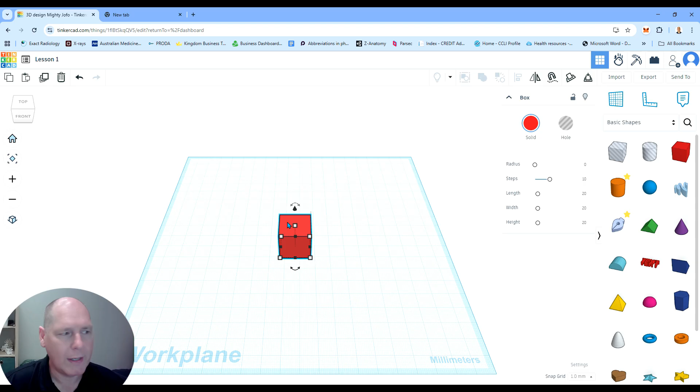I can do it one of two ways—either use the mouse wheel, or simply select this button here and it will take me right up to the image. For me that's a bit close, so we can use the minus button to go back a bit, and get closer again as well.

This one here will just bring us into a different perspective. I'm not a fan of that, so let's go back to more of a 3D perspective. Let's start with copy and paste.

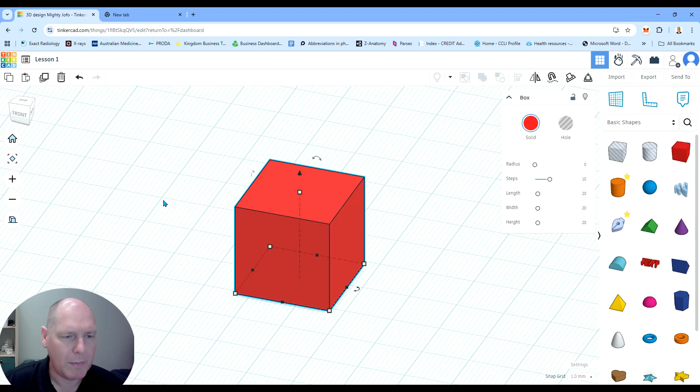Simply copy—we've copied it—paste, and we paste the new one right there. What's nice about copy and paste is we can actually copy and paste from other sessions. So let's say you've got another one open, you can copy and paste that object over straight into this one.

Next one is duplicate. Duplicate is going to create another copy of the object in exactly the same place. So we hit duplicate—this is where duplicate becomes powerful. Now we have object 1 and object 2.

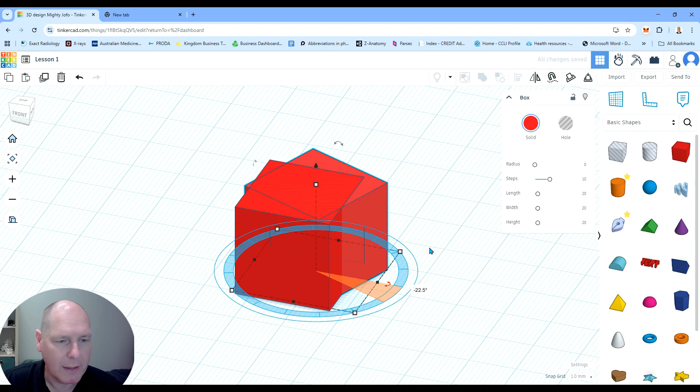I'm going to take the duplicated one that's selected, move it out just a little bit like this, and rotate it 22.5 degrees. Now you'll see that block is different.

Now let's say I want to repeat what I've done. I don't have to do another duplicate and turn it again—I can simply hit the duplicate button again, and it's going to duplicate what I've done. So if I've moved it, it's going to move it the same amount, same direction, and also rotate it the same. Let's duplicate it, and you'll see the next one has been placed like that.

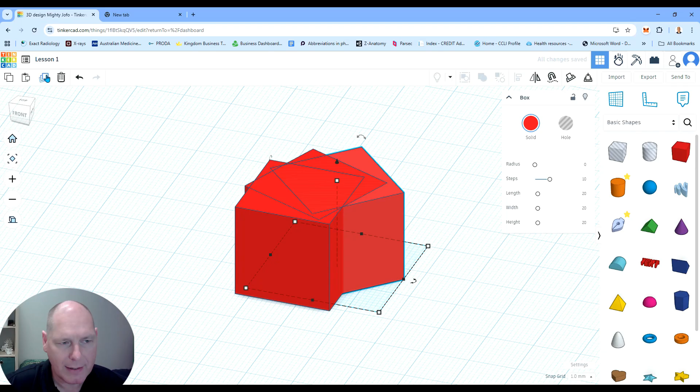If we carry on like that, we're going to get a nice little circular pattern. Okay, great—there's our circular pattern.

Now the next button is self-explanatory, the trash can—don't like it, trash it. Next one's undo—still didn't like it, let's undo the trash. Very straightforward and simple.

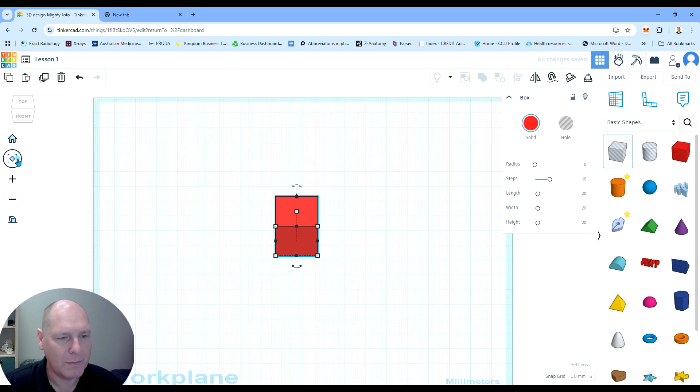Home just takes us back to this block over here, and as I said earlier, this zooms in on the selected pieces. Plus and minus changes our perspective to that again.

Now we're going to move on to the other side, and again there's a lot of things that are not available yet. So if we then bring out a few extra objects, let's put a little cylinder over there.

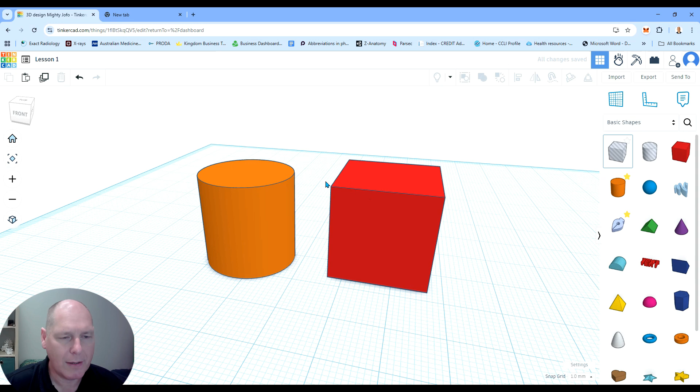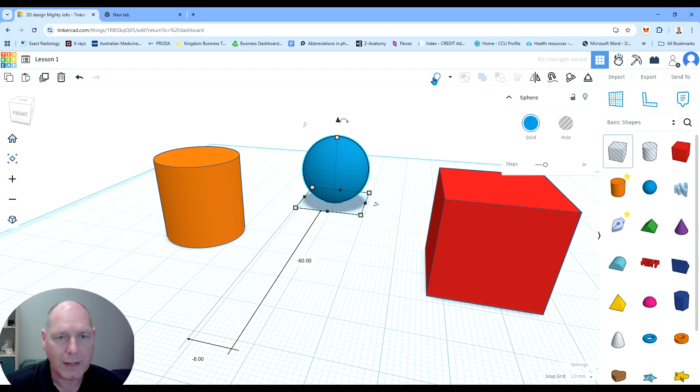Now you'll see that there's some more options in the light bulb. There's for notes and there's for connectors as well. So I'm not going to cover connectors in this video.

Notes, very simple. If you look at the side here, you'll see that's a little notes tool. And we just put it down there and we can say ball. And we've got a note.

As I said earlier, we can now go, great, we've got the little note there, we can then move it around. You can click on it to see it, and it's got a trash can to delete as well. But we can also then hide it. So we click that button there, now the note's gone, and we can show it again by selecting that button. Let's just delete it for now, we don't need the little note.

Great, so moving on from here, we're going to look at the next three tools. And if we've got three objects here, we've got a cylinder, sphere, and a square.

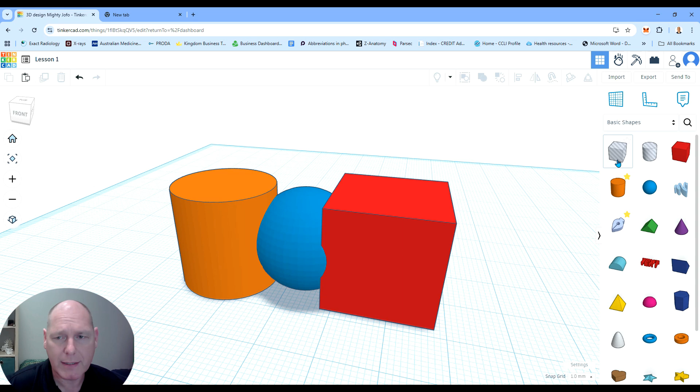If we then want to combine these, the first thing we want to do is group it together. I think let's just add a hole in there as well, just to show you exactly what's happening here. So let's just add a hole like that. So let's say I've got my objects together. I can shift select it like that, and I can then go and bundle group it together. Shortcut Control B. If I bundle group it, I've just grouped it together.

In other words, they're still separate objects, they're just grouped together, and I can go break the group apart, and I can go move each piece.

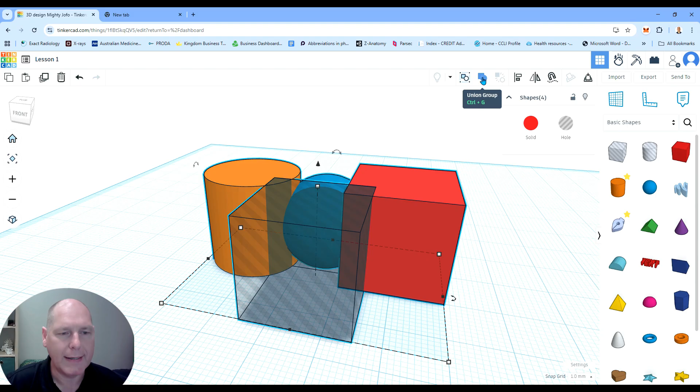Nothing has changed. Now, the next level of grouping is what we call the union group. So what it's going to do here is combine it. It's going to union it. So in other words, the hole is going to cut out pieces of the solids, and the solids are all going to combine into one.

So let's use the union, and you can see here, we'll just confirm it. So what's happened now is we've got a single object, and you can see that piece that's then been cut out from there. Okay, again, we can simply break it apart again and go work on individual pieces from there.

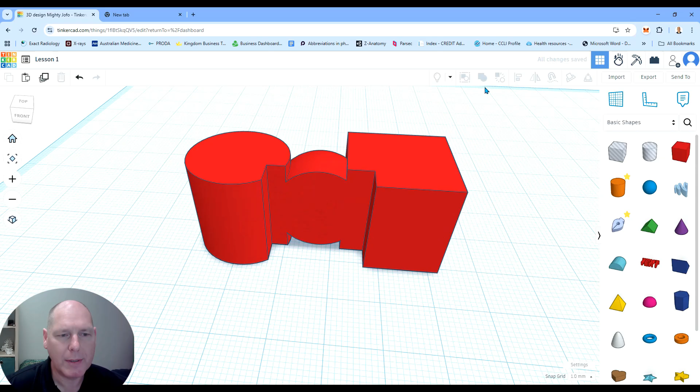Right, so for now let's just group it like that, because this is going to show a little bit better how the mirror tool works. So we've got this bizarre piece now. Let's say, oh, I actually want to mirror it the other way. You can hit the mirror tool, and you can swap it around, and flip it around like that as well. So that's what's handy about the mirror tool in that sense.

So let's just go back, let's break this apart again. And the next tool I want to go through is the align tool, which is right through here.

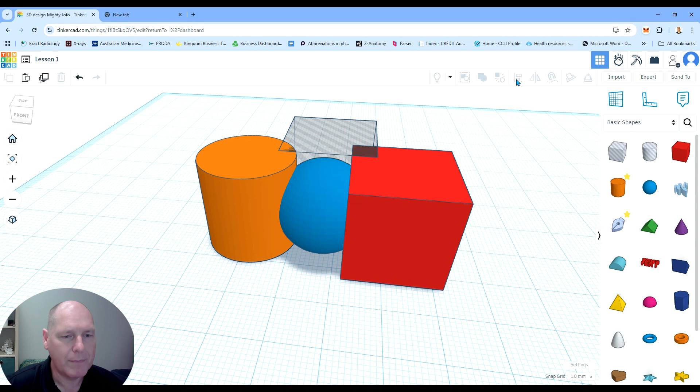So let's say we want to align these things all up. We select the ones that we want to align, we hit the align button, or L for shortcut, and we can line them up nicely in the center. You can see they're all nicely centered now.

Let's undo that. Let's say, great, we actually wanted to align them only to the blue ball. So did you see what I did? You select all of these, you hit align, then we hit the blue ball. We're going to align all of this now to the blue ball. So let's line it up that way with the blue ball. So the blue ball hasn't moved.

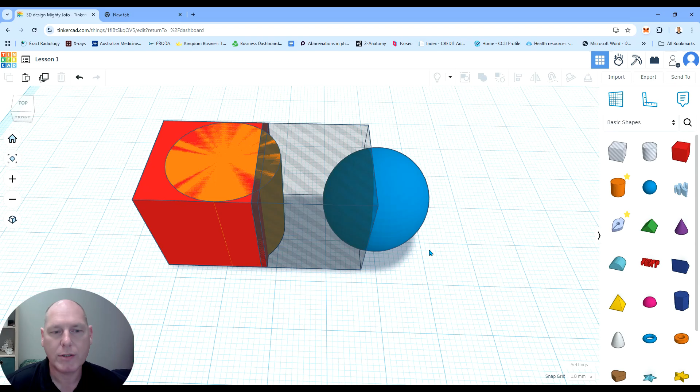And where this is handy is that, let's say you've got this whole construction going, and you want to line up just certain parts of it. You can simply align everything to that piece specifically. Make sense? Right.

Now the next part is a fun one. It's called cruising. Now cruising is quite an interesting thing, because we're going to be using cruise with workspace. Now, if we take this object here, we have a specific workspace for that object.

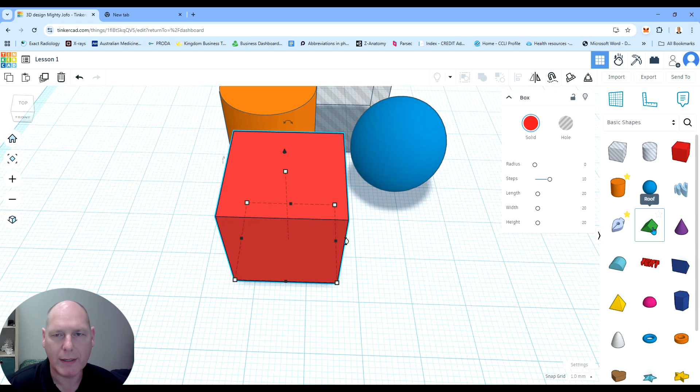Now let's bring a new one in. So we click on this one, we select the workspace, and we want to bring a roof in. Can you see that there's a nice little circle on the surfaces of the square?

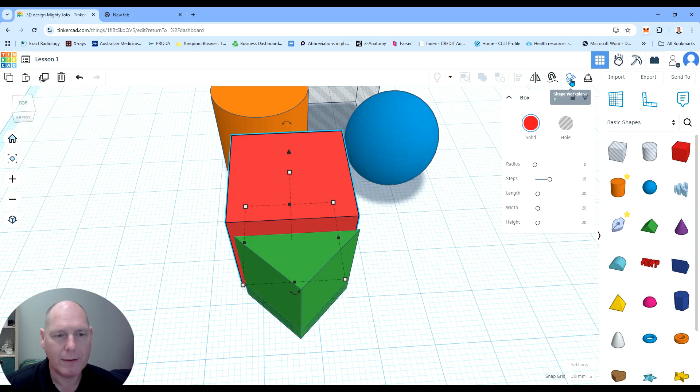So if I put it on there, it's going to line up like that, and you'll see that it's now got its own unique little workspace. So instead of this one having the flat workspace of the square, the green one now has its own workspace in that direction. Now this is where cruising becomes handy, because if we use this specific tool, we can cruise it along like that. Now sometimes we don't have the workspace selected, then we can just hit the cruise tool to do that.

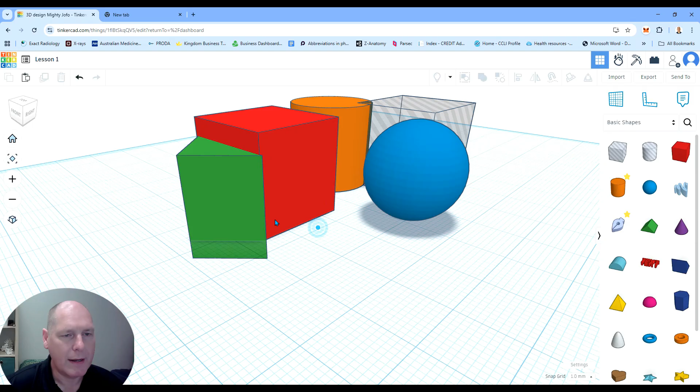Now I think a better example will be, let's use the sphere instead. So let's put a funny little cone on it. Now we're going to click on the cone. We want the cone - if we just select this, you're going to see it go up and down like that, that's not going to help us. Same if we move it this way, it's not going into the sphere.

But we want it to cruise in the direction here. So we can click this one to see the plane - that's the plane along which it's going to cruise. Then we hit the cruise button, so we click on it. We hit the cruise button, and now...

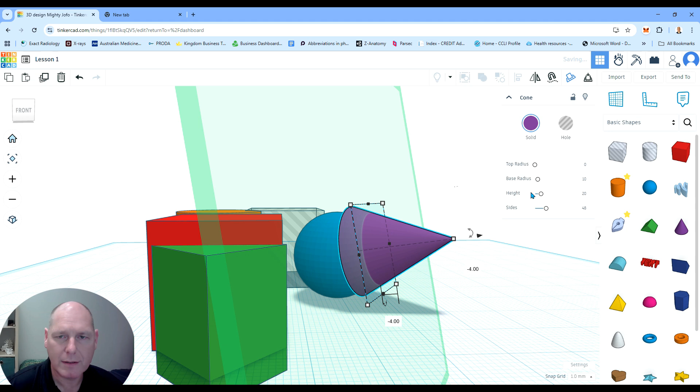When we hit the cruise button, we can now move it across the plane like that. The cruise button just helps us to move that plane. So let's say we've got this cone and we want to cruise it along there, we want to make sure we put it right there. Remember now, when we started with a new object, let's start with the cone again - that cone will have that circle underneath it. We're cruising it around and we want it there.

Let's say we've got a cone now, we've got the plane for the cone, we can move it like that. But if I now move the cone around, it's only going to stay at that plane if I use that plane. Now if you want to move that actual plane, that's where we hit the cruise button, and we can cruise it around again and change that plane. And now we can cruise it in and out like that. Hope that makes sense.

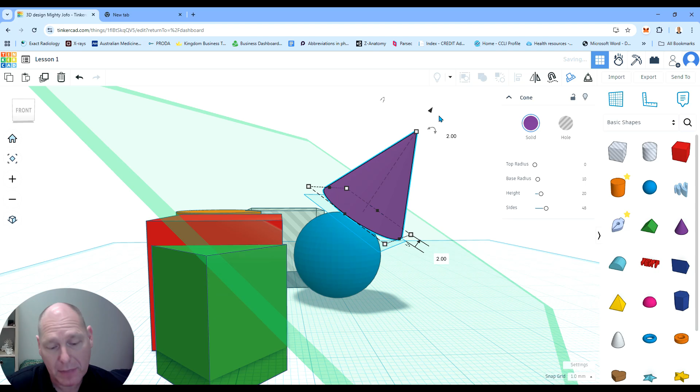So that covers all of these buttons through the top. The next ones I'm going to show you - we've already spoken about the notes. The ruler is very handy.

If you want to put a ruler down through here, for example, right by the square - great, we've got the square in the corner, we want to move this relative to the square. So you can see exactly the distances, you can see how high it is. If you raise it up and down, you can see those distances as well. That's where the ruler is very handy.

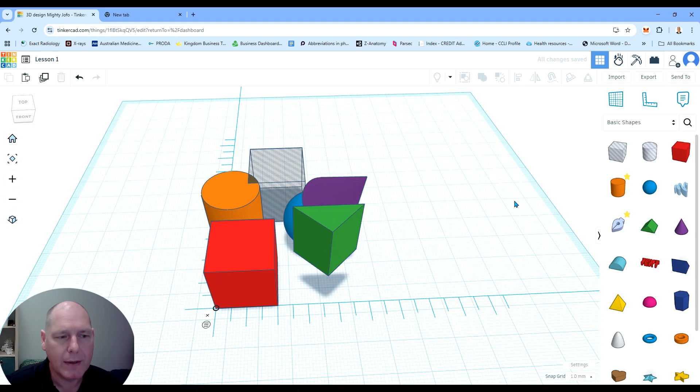Okay, the work plane button. Let's say I have moved this thing up through there, and I want to change the work plane up to there. I can actually go and change the whole work plane to start at the top of that. Now you'll see that all of our stuff is all over the place, but we want it to lie on top of the work plane.

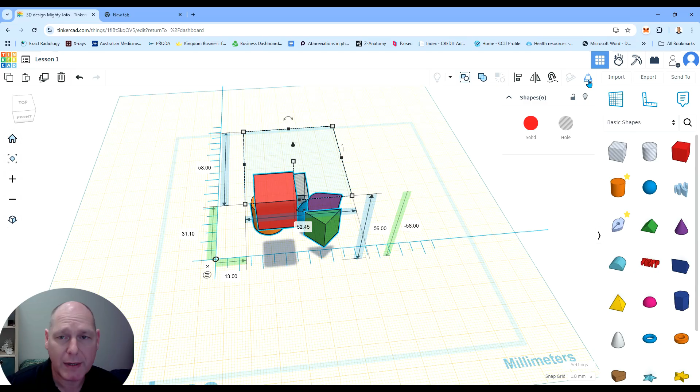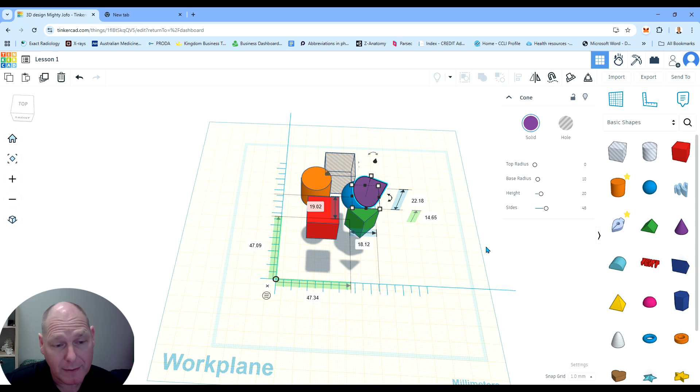So that's where this button comes in, the drop to work plane. Wherever you are, you can hit the drop to work plane button, and that's going to drop everything back down onto the work plane. Only thing is, now you see we've got a very different work plane compared to the blue block - this is taken over where the original blue block was. Later on we'll be using this a lot more. In general, I try and avoid changing the work plane, only if I really need it, that's when I will change it.

Last few buttons: import, save, import files, export and send to. And then we've got some little buttons up at the top here, which I'm going to say don't worry about for now. So I hope that covers all the menus for you, and I hope that all makes sense.

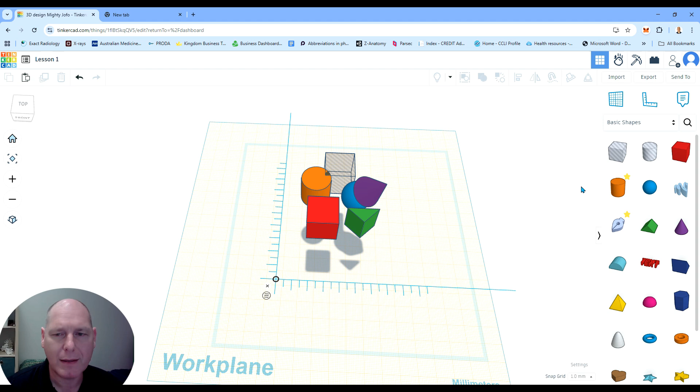Next video we're going to go through just the basic shapes and how to understand and use the shapes. I'm also going to talk about how to think in 3D, because it's very important when you design in 3D and make things 3D, to try and think of different planes, different positions as well. See you on the next video.